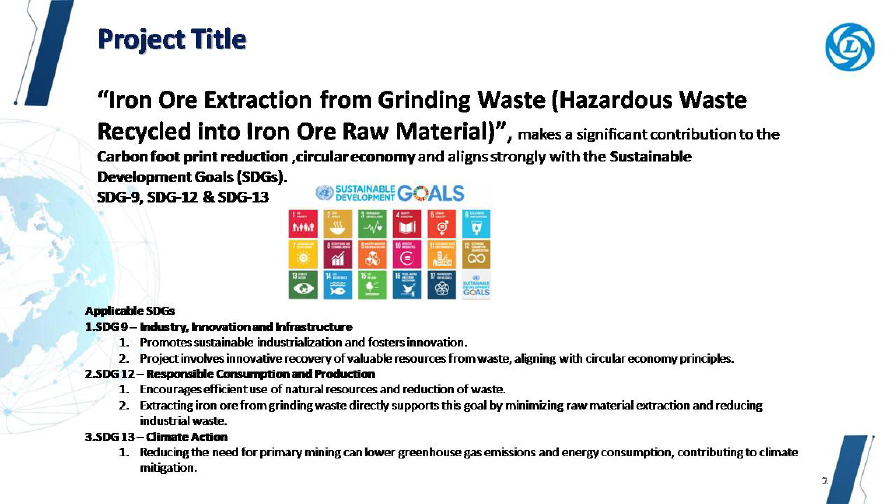This is our project title, Iron Ore Extraction from Grinding Waste. This makes a significant contribution to carbon footprint reduction, circular economy and aligns with SDG goals 9, 12 and 13. The overall generation of grinding waste in India is found to be an average of 50 lakh metric tons.

At Ashok Leyland, we take immense pride in our legacy that spans over 75 years since our founding in 1948. Our vision is to be a top 10 global CV player. We are headquartered in Chennai, Tamil Nadu.

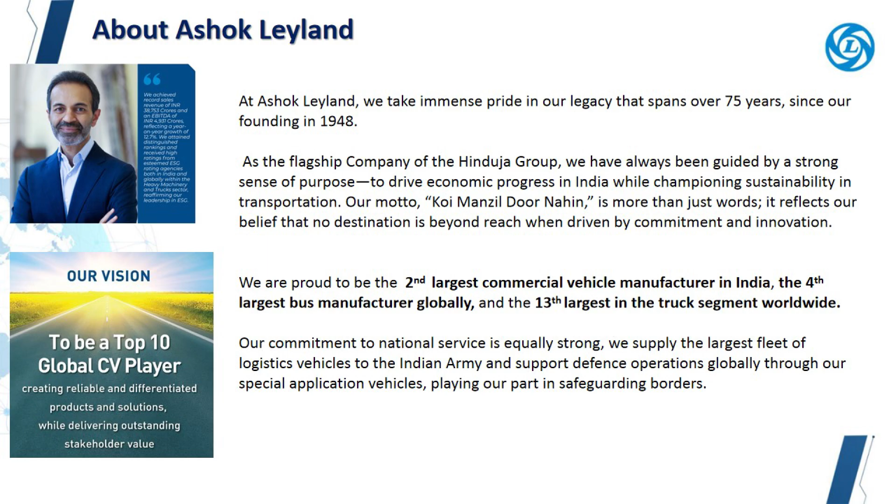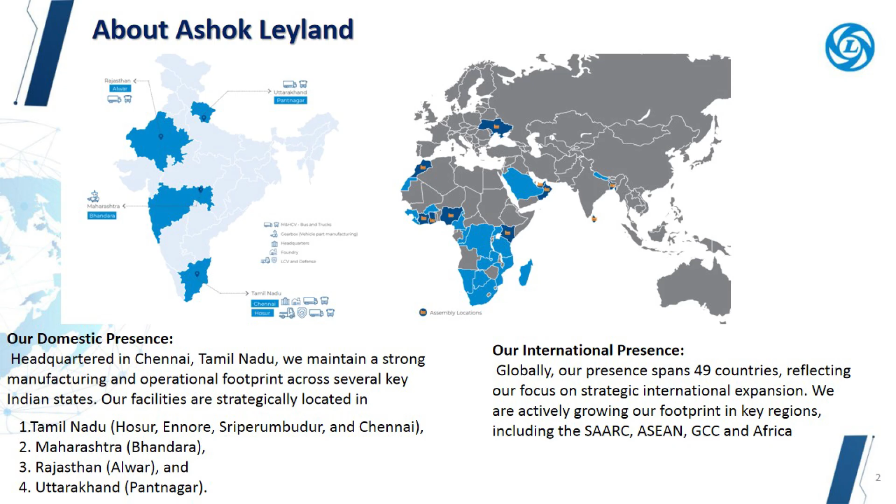Our facilities are strategically located in Tamil Nadu, Maharashtra, Rajasthan and Uttarakhand. Globally, our presence spans 49 countries, reflecting our focus on strategic international expansion. We have manufacturing and assembly facilities, including heat treatment, at our Ennore facility, Ashok Leyland.

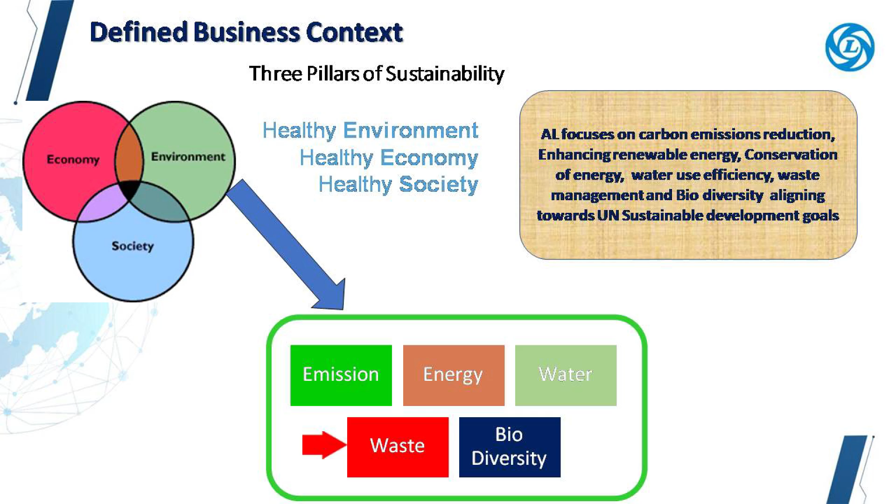Let me define the business context. These are the three pillars of sustainability: healthy environment, healthy economy, and healthy society. Ashok Leyland focuses on carbon footprint reduction and energy conservation, and our team focuses on hazardous waste reduction.

As a team, we are committed to minimizing hazardous waste at our Ennore facility. We adopted a prioritized approach to waste management, identifying and addressing the most critical waste streams first. Last year, we successfully completed the paint sludge recycling project.

This year, we have taken up grinding sludge as our next priority, launching an innovative recovery project to further reduce hazardous waste and promote sustainability.

The grinding sludge disposed is in category 5.2 of hazardous waste. We have an authorized recycler by the name of GEPIL at Ranipet, 160 km away from our factory.

They are engaged in co-processing of hazardous waste and supply this processed hazardous waste as an alternate fuel to the Dalmia cement factory, which is 300 km away from our factory.

The annual disposal quantity of grinding waste is 120 metric tons, and the disposal cost is rupees 10.9 per kg.

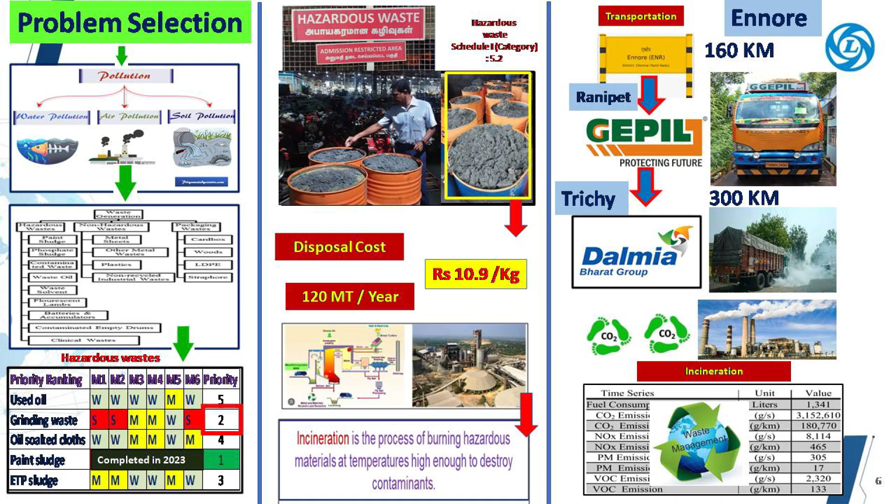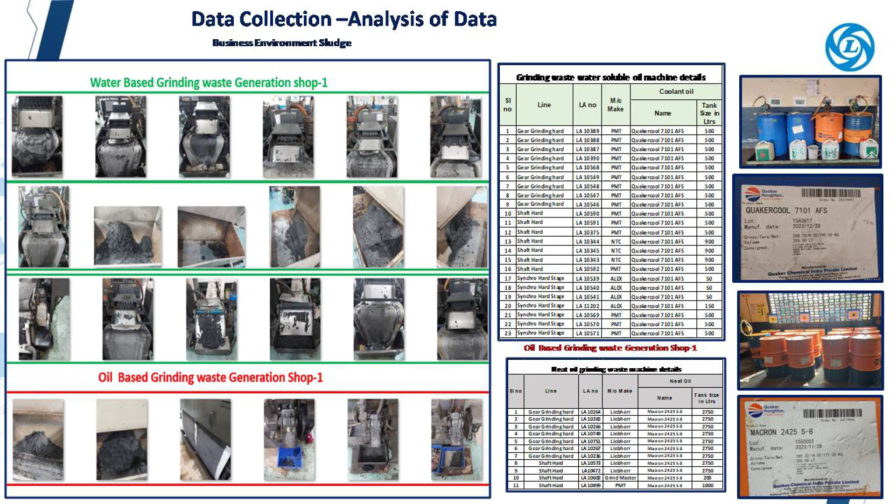We focused on the gear shop, where grinding waste is generated in the forged steel components machining process. We have 23 machines which use Quakercool water base to generate water-based grinding sludge, and 11 machines which use neat oil macron to generate oil-based grinding sludge.

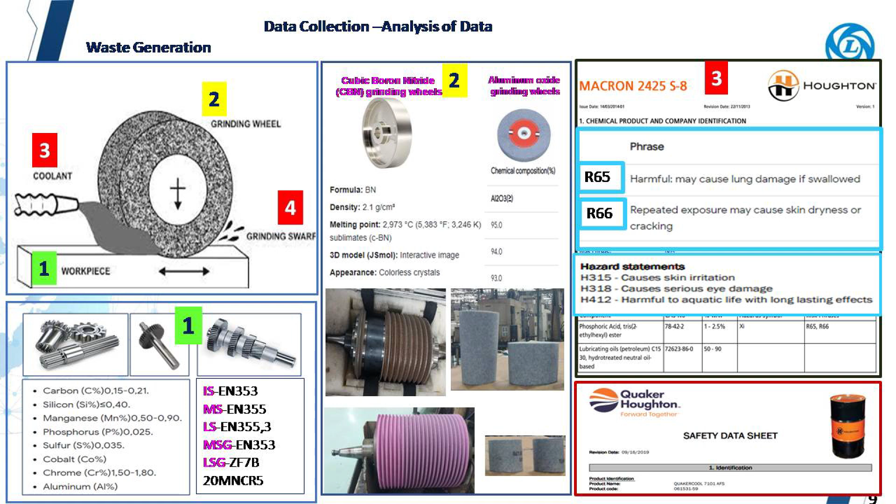The grinding waste consists of the workpiece part EN353 etc., the grinding wheel which is silicon-based, and coolant with chemicals. We also identified the presence of hazardous substances classified under R65 and R66 in the grinding waste, indicating that the material poses potential health and environmental risks.

To better understand the composition of the grinding waste, we submitted samples of both water-based grinding sludge and oil-based grinding sludge to the National Testing House Laboratory. The analysis revealed a significant presence of ferric oxide, Fe2O3, in the sludge.

The grinding waste primarily contains silicon, nickel, Fe2O3, chromium and Al2O3. Laboratory analysis revealed that ferric oxide constitutes about 59% of the waste, representing a significant source of iron.

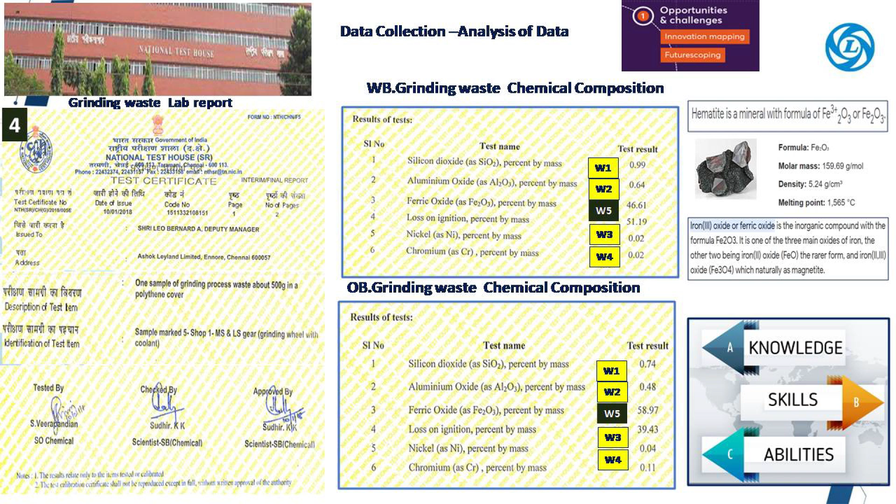Based on this finding, we decided to extract iron from the grinding waste. Our team used the TRIZ methodology to identify breakthrough opportunities that could unlock the potential for resource recovery from grinding waste. We identified the breakthrough factor as transforming the defect into a resource, and also identified the homogeneity principle,

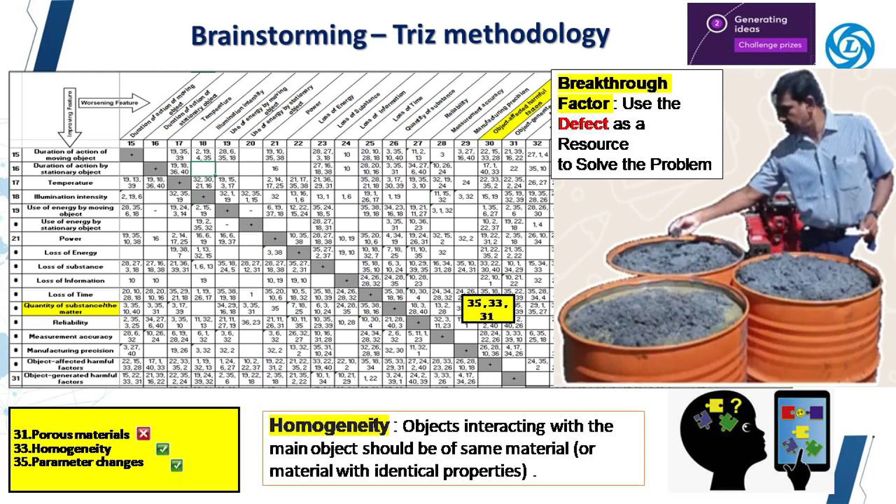which is material compatibility in interactions. We used the periodic table to identify the properties of 5 elements: silicon dioxide, nickel, Fe2O3, chromium and Al2O3. We adopted the 3I approach: imitate, improve and innovate.

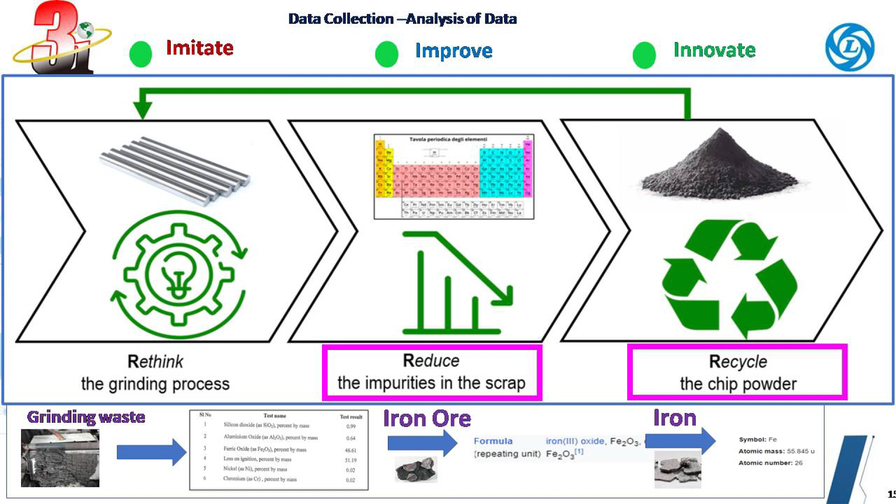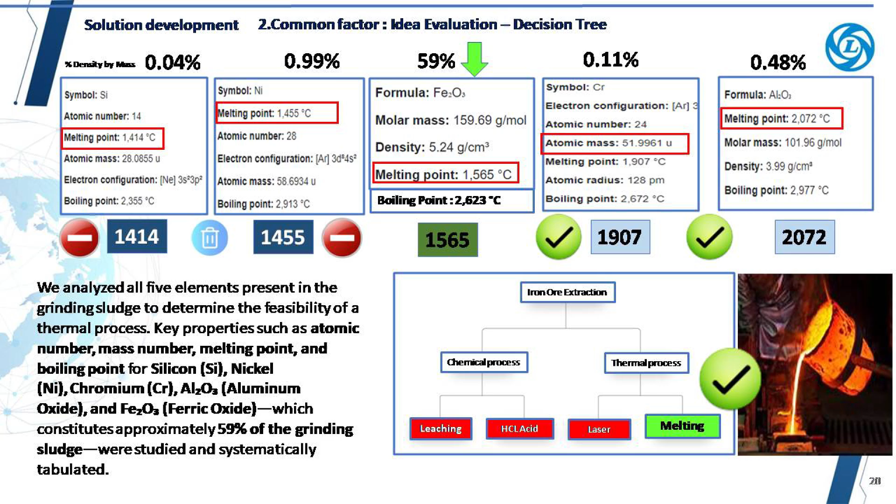As part of this, we revisited the composition of grinding waste to reduce impurities by studying the presence of nickel, chromium and aluminum. We analyzed all 5 elements in the grinding waste to determine feasibility of a thermal process, and the same was studied and tabulated. Out of this, Fe2O3 constitutes 59% of the grinding waste.

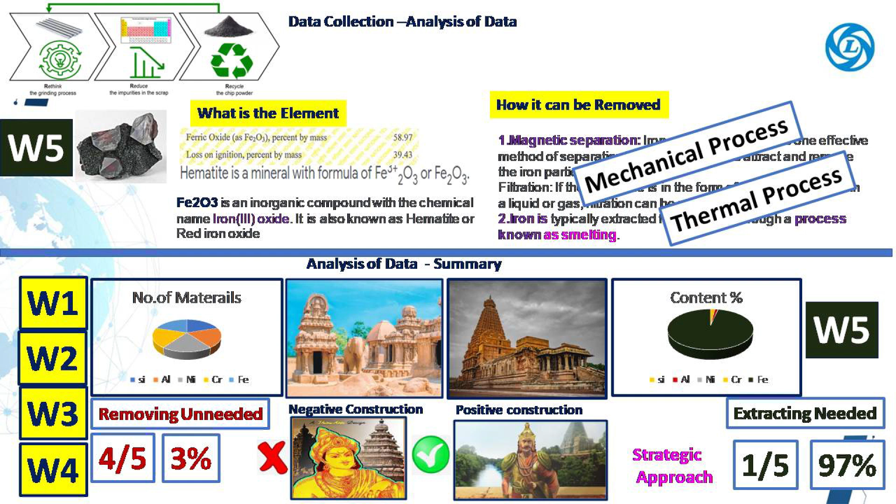Aluminum can be separated using a thermal process, while silicon, nickel and chromium require a chemical process for effective separation. Our team decided to separate the unneeded silicon dioxide, aluminum, chromium and nickel, which constitute 3%, and extract iron Fe2O3, which is 97%, through a mechanical and thermal process.

As part of solution development, we approached the magnetic separation method. Since magnetic separation was not giving desired results, as slag and iron were both attracted and it was found to be time consuming, it was dropped.

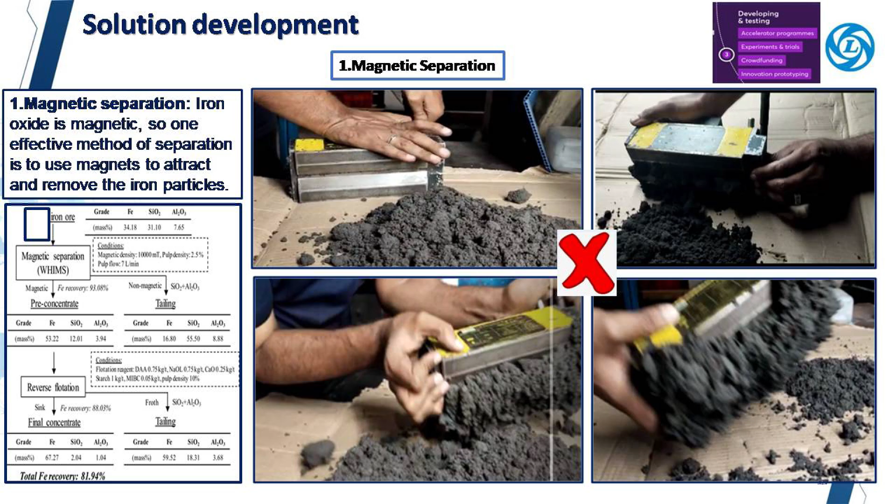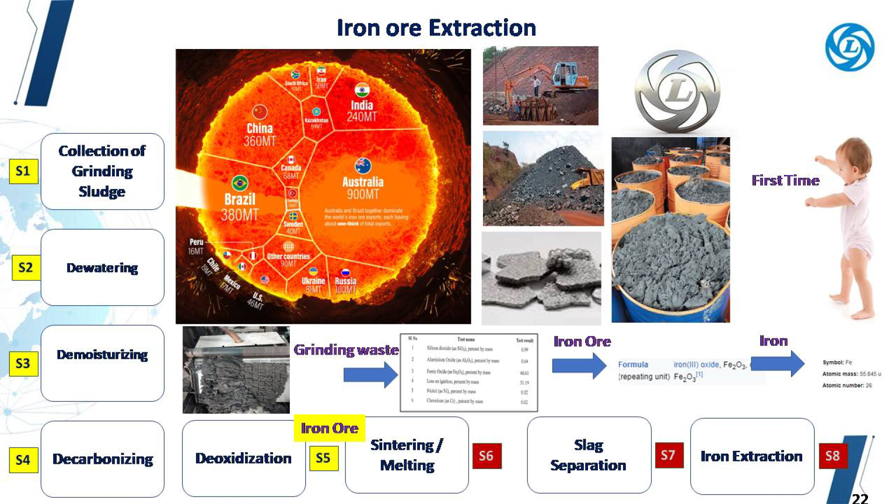So we went for an alternative solution, the pyrometallurgical process, as a viable solution. After evaluating alternatives, we finalized the pyrometallurgical approach and implemented the following steps in our project.

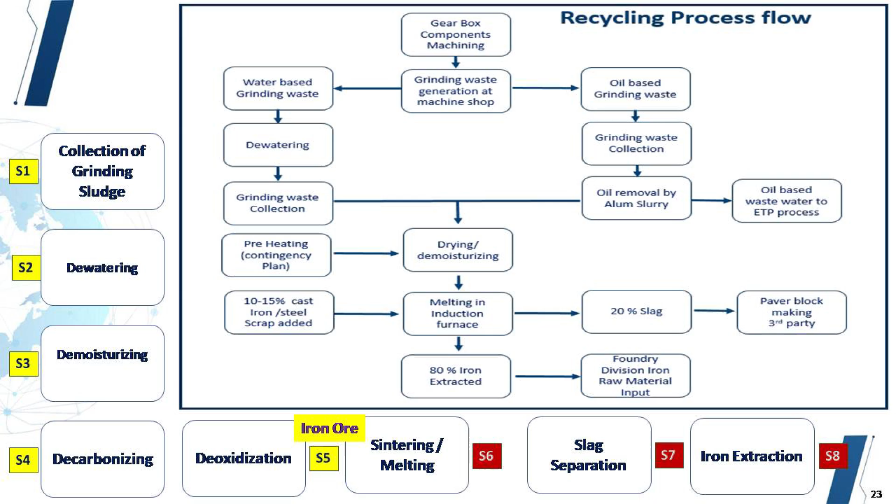As a first step, collection of grinding sludge, next dewatering, demoisturizing, decarbonizing, deoxidation, sintering, slag separation, and finally iron extraction. In this innovation model of the POC, at stage 1 we collected the grinding sludge and categorized it

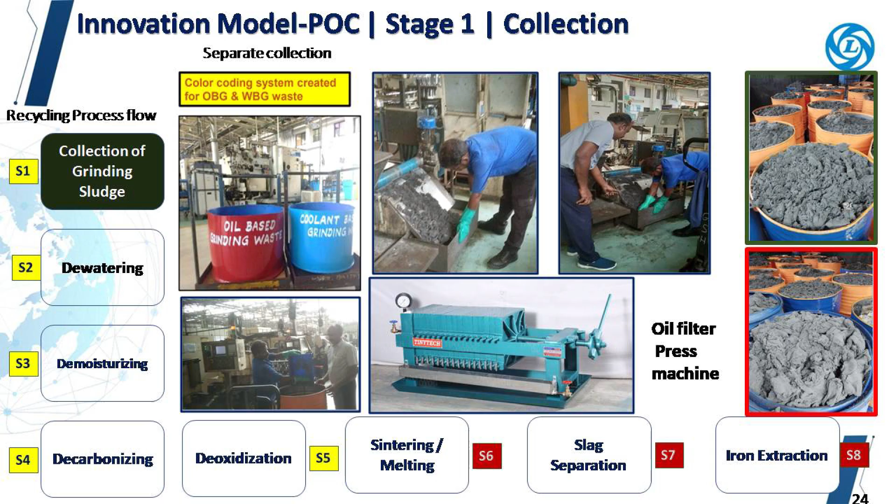into oil-based grinding sludge and coolant-based grinding sludge, as shown in the slide. In stage 2, the dewatering stage, we went for dewatering of the grinding waste, as thermal drying is an effective sludge treatment method for dealing with large volumes of sludge.

In stage 2, for oil removal from the oil-based grinding sludge, we used magnesium chloride and alum in the ratio of 1:1000, and alum slurry with the hazardous waste.

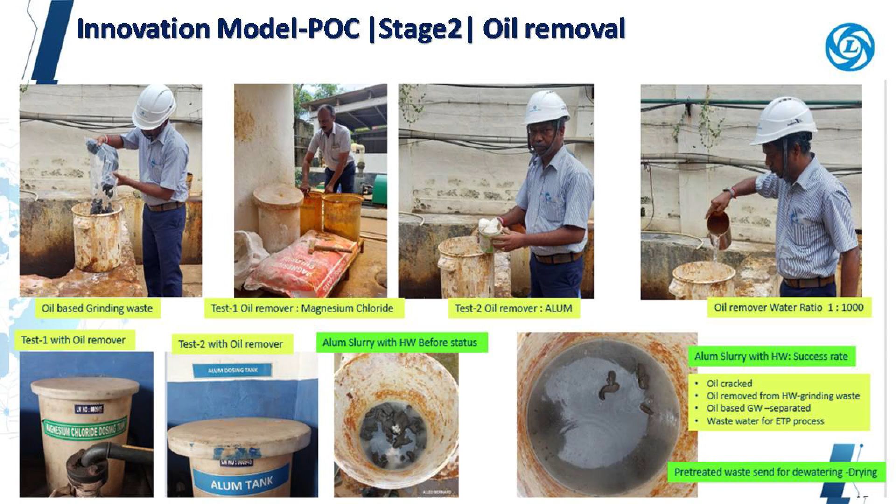We could see the success rate. Oil was cracked and removed from the hazardous grinding waste. Further, you can see the separation of water-based grinding sludge and oil-based grinding sludge.

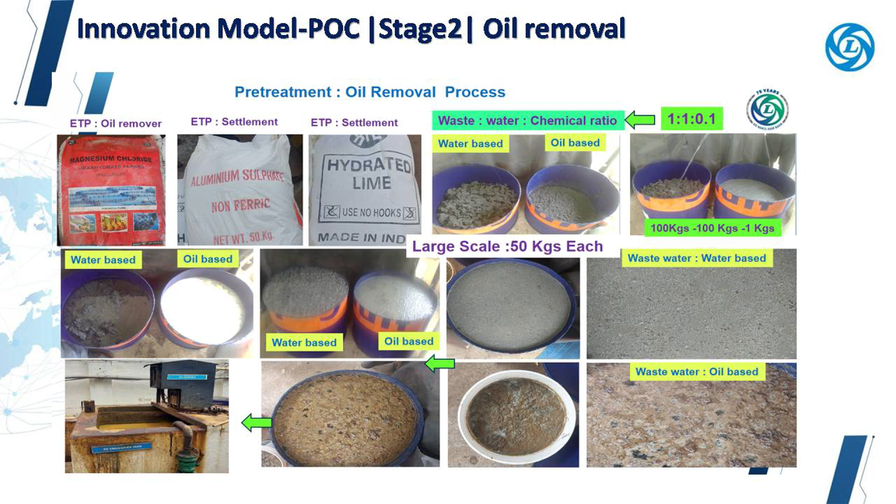You can see the oil removal process of waste-water chemical ratio of 1:1:0.1 as shown here. In stage 3 of the POC concept, we can see the demoisturizing, where the grinding sludge is spread in a big trolley for demoisturization.

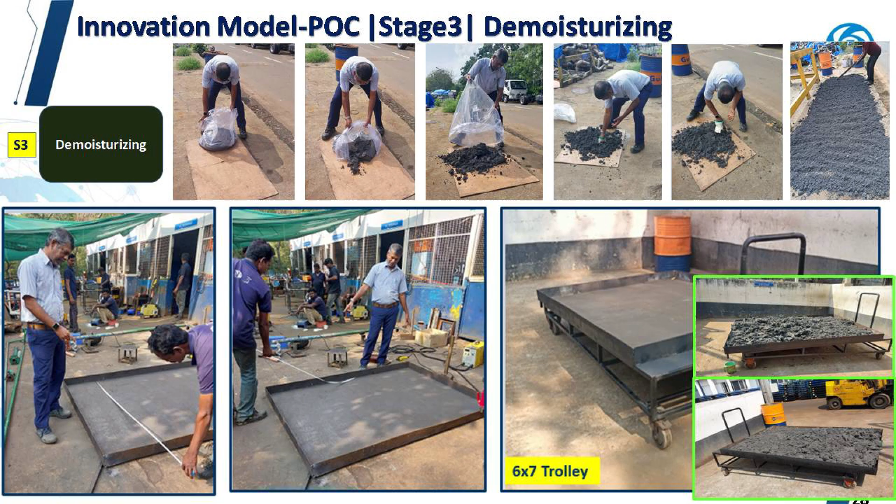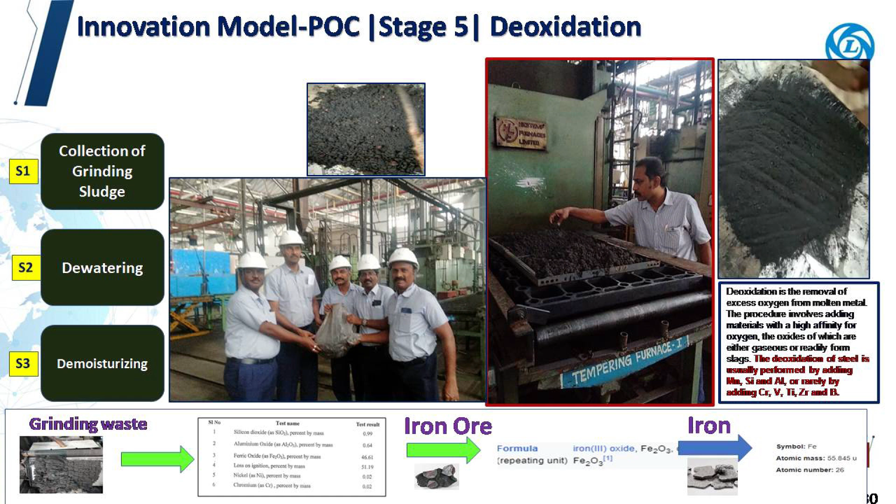In POC stage 4, the decarbonizing process refers to the removal or reduction of carbon content from metals, typically during refining or recycling operations. You can see the proof of concept here. At stage 5, deoxidation is done, which refers to the removal of excess oxygen from molten metal, achieved by adding substances with high affinity for oxygen, which forms oxides that are either gaseous or easily converted into slag.

In stage 6 of the POC concept, sintering is done. Sintering is a thermal process where fine particles of metal or ore are heated to a temperature below their melting point until they bond together.

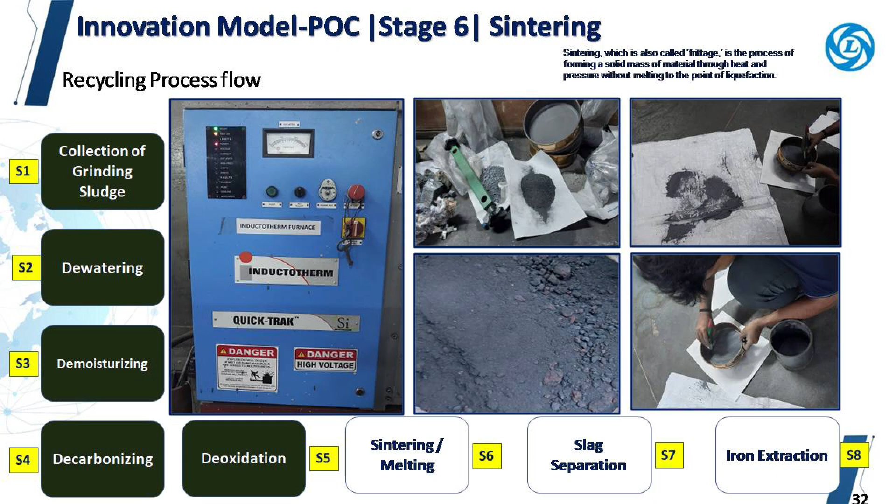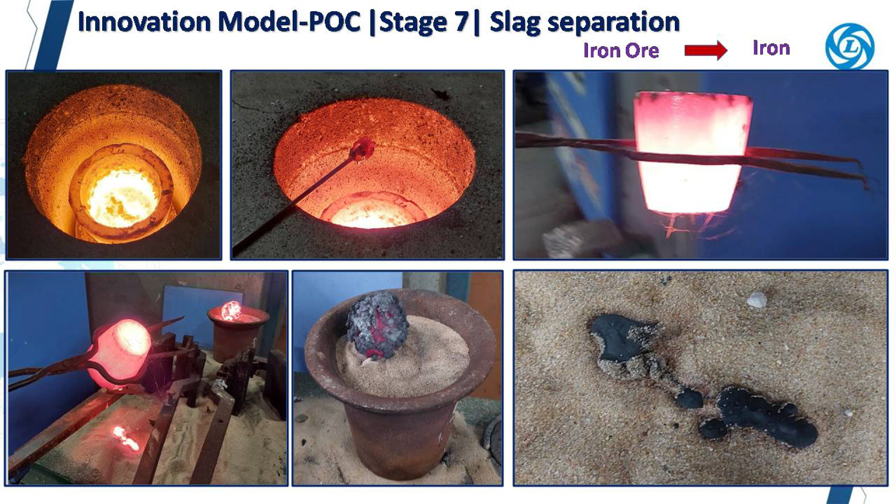Stage 7, melting, involves heating the material to a temperature above its melting point, converting it into a liquid state. The process concludes with slag separation followed by iron recovery, which is then converted into steel shot, coins and bars as the final product.

We made a trial. We took 500 grams of iron ore, placed it in a graphite crucible and attempted remelting in the furnace. The material required extended heating time but did not achieve a fully liquid state. A significant amount of slag was formed and only a small quantity of metal was extracted. Based on our observation, the oxidized nature of the material prevented it from melting directly in the induction furnace.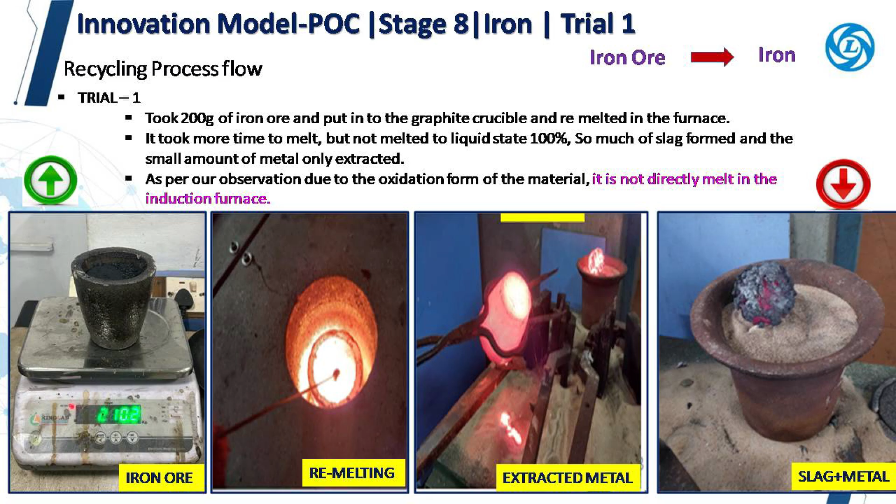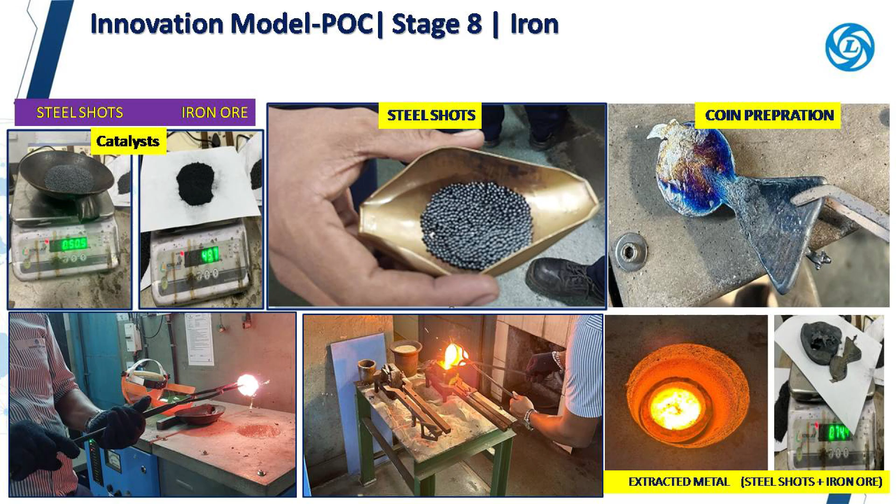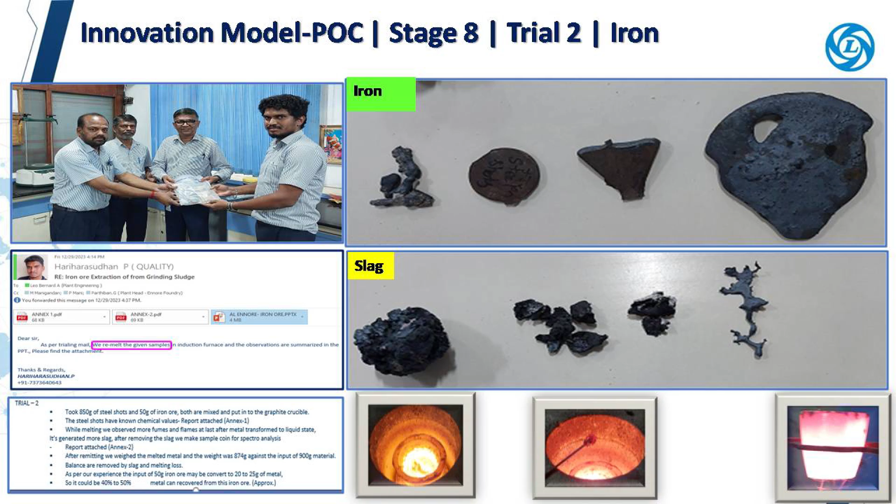We decided to add steel shots in stage 8 of the POC concept and made trial 2 observations. Out of 900 grams of material, 874 grams was recovered, with the remainder lost as slag and fumes. When 850 grams of steel shots were melted together with 50 grams of iron ore in the crucible, the 50 grams of iron ore yielded approximately 20 to 25 grams of metal, indicating a metal recovery rate of about 40 to 50% from the iron ore.

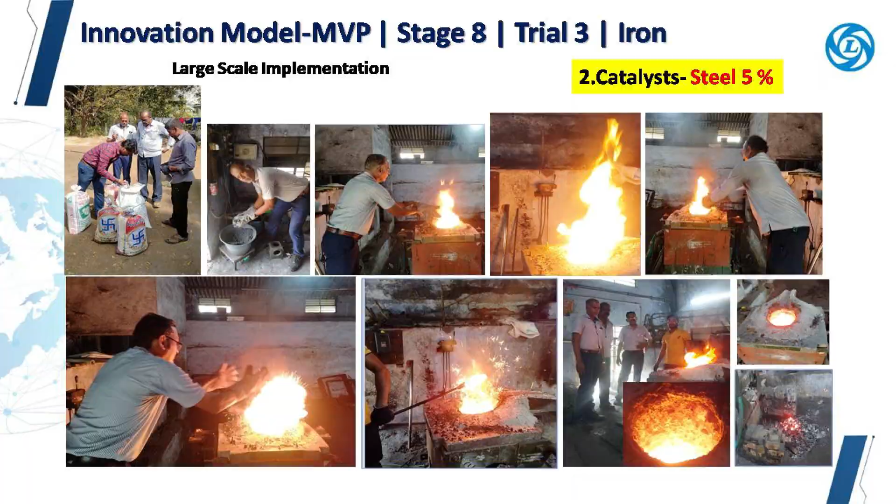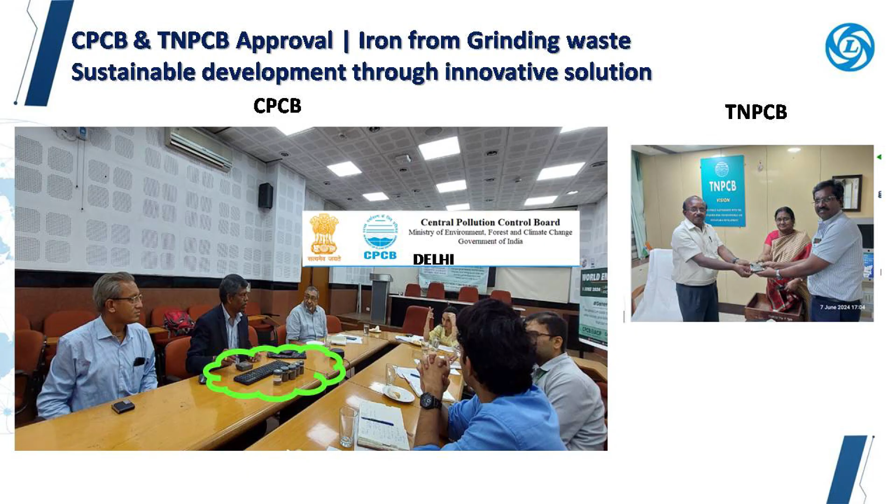This innovative project of iron from grinding waste was reviewed by the Central Pollution Control Board, and they have given the approval. You can see the expert committee giving the approval, and we also further discussed it with the Tamil Nadu Pollution Control Board. Our team, for the first time in India, converted 100% of this grinding waste, which is a hazardous category, into a non-hazardous category.

We have achieved 52% recovery of iron in trial 1, 70% recovery of iron in trial 2, and 80% recovery of iron in the large scale implementation in trial 3, with the remaining 20% being slag. Really, this is a breakthrough result. You can see the entire hazardous category converted into a non-hazardous category: 80% iron, which is non-hazardous, and 20% slag, which is also non-hazardous. This is the breakthrough result.

Let me brief on the savings and sustainability summary. Total generation is 120 tons per year of grinding waste. The current disposal cost is 10.9 rupees per kg, and the annual disposal expense is around 13 lakhs rupees.

If you look at the iron recovery rates, initially we got 52% at ALFD Ennore. Later at vendor 1 and vendor 2, we had 70% and 80%. So the expected recovery was 96 tons per year, around 80%. For revenue potential, taking the iron scrap reference value of 32 rupees per kg, our annual savings stand at 30 lakhs. Look at the environmental benefits.

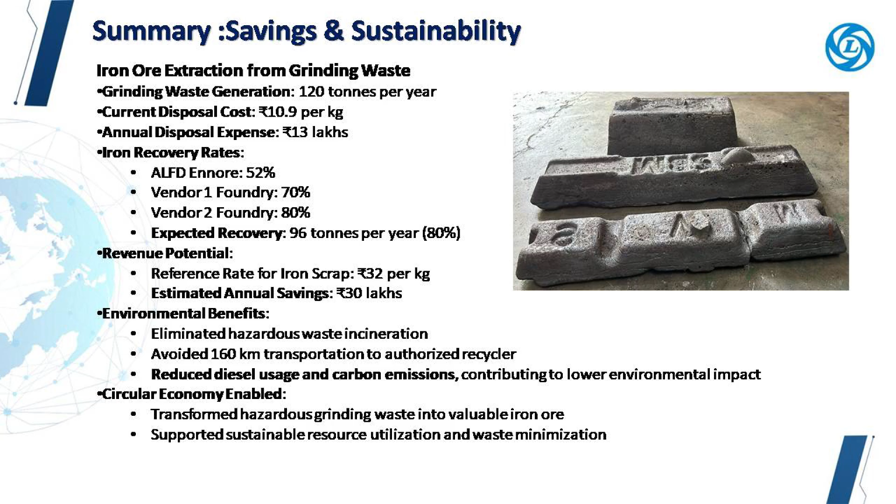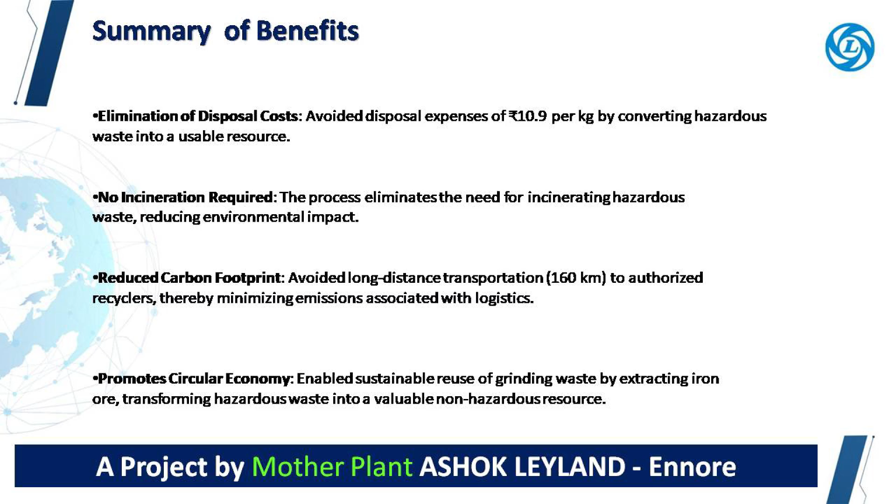We have eliminated hazardous waste incineration, avoided 160 km transportation to the authorized recycler, reduced diesel usage and carbon emissions, and enabled circular economy. This is the summary of benefits: total disposal cost eliminated, incineration not required, reduced carbon footprint, and promoted circular economy. We are proud that we have done this project in our mother plant, Ennore.

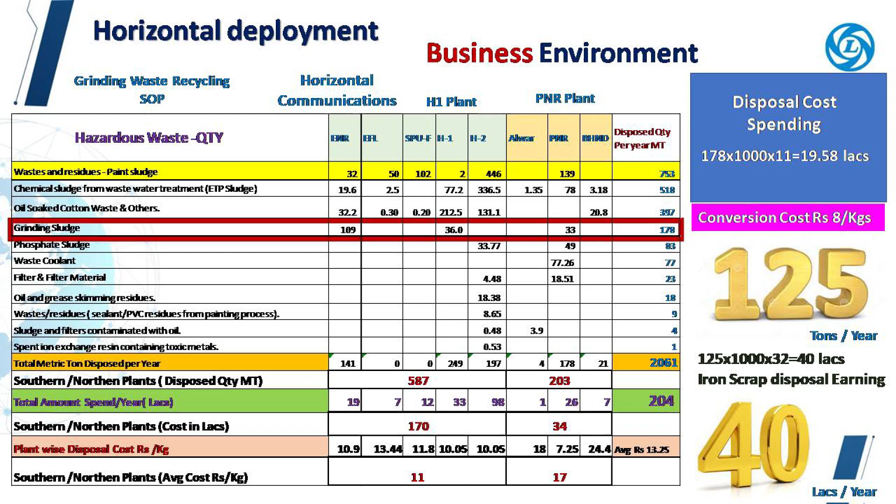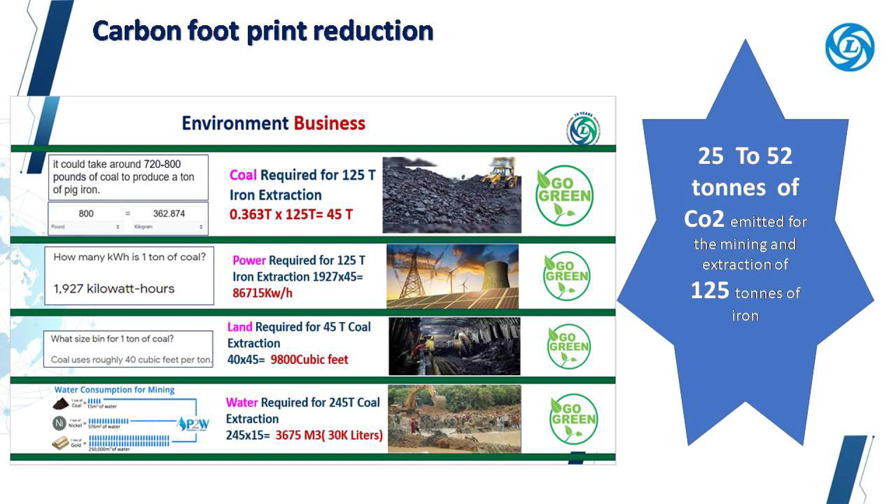This innovative project was shared with the National Productivity Council, Center for Environment Studies, Anna University, IIT Madras and Delhi. As part of a knowledge sharing session, this innovative project was presented to various colleges and student communities across Tamil Nadu, inspiring them to embrace sustainability and the principles of circular economy.